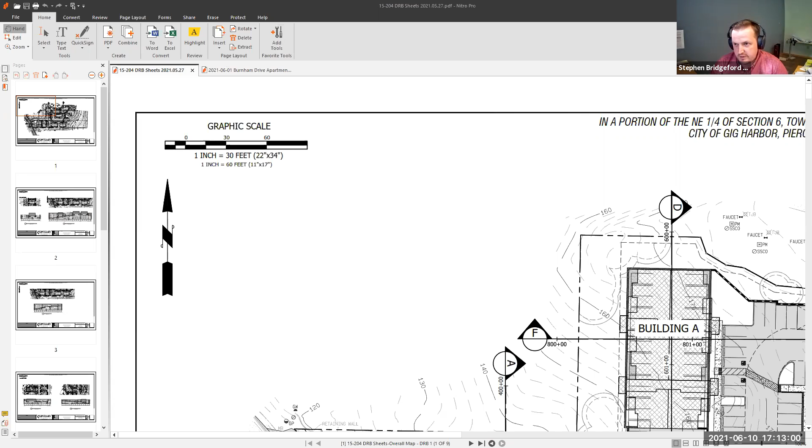So we've put together some more detailed exhibits for review tonight, giving a higher level of detail across the property with cross sections to take a look at the grading elements and talk about some of the options we investigated during preliminary review on that accessible path into the site, and things we considered to try and make that work and make it as accommodating as possible to access the middle of a site that's as sloped as it is, which is always going to be challenging to tick all the boxes to make it work right.

Be as accessible and accommodating as possible. So I guess we can just go through some of the cross sections here in detail, if there's some specific areas that the board wanted to see in relation to things. I don't know that there's a specific presentation more than just additional information to try to help answer some of the questions that came up in the previous meeting. If there's specific areas we wanted to look at on how things sat and how we balance showing some of the finished grades and existing grades on the site.

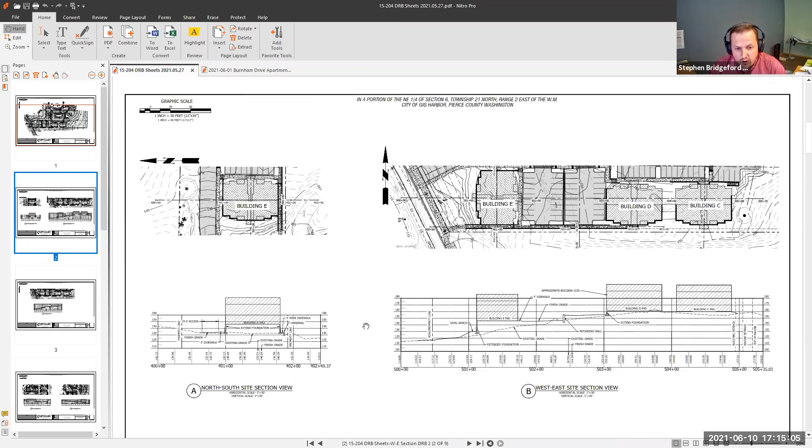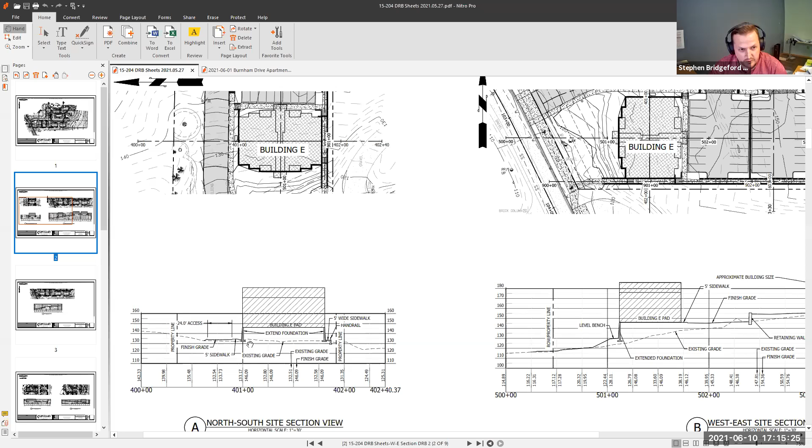This sheet is just the general overview of the property, showing the existing grades. But we'll go down and look more closely at this, this is building E, which is up front. You can see how it sits, and that walkway down here, where the accessible walkway comes up along the side of the building, and how the building is associated with the finished grade.

We tried to keep our scales here so that the horizontal and vertical scales were showing more of a realistic presentation, rather than oftentimes you'll see that horizontal scale and vertical scale are different, so you see some exaggeration. But with how the building here sits up front...

Moving over into a view that runs along that entire southern property line, showing how the site steps down here with the extended foundations. And I'm not seeing, I guess the walkway doesn't really come up on this, Jeremy, in this view, taking it through the building side there, so we can't really see how the walkway works along that side, but we can see the general grading with the existing grade here in the dashed line, and then our finished grades with the site stepping up the slope.

To prevent the mass grade. In this area here, as we mentioned before, this is where the storm facility, part of the storm facility, will go under this parking lot. So that's some of the fill and grade associated with how that underground storm system will work in there. And the buildings we're showing just as a general shape and height, just for reference. We're not showing the architect's exact building, just the general height of the buildings in this view.

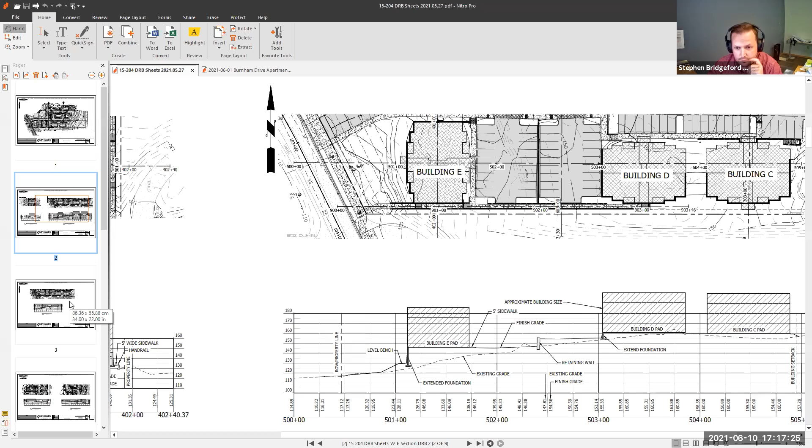This view shows the walkway. We've got a cross section coming right up the center of that walkway, showing how that interfaces with the existing grades and where those lifts will be.

One of the questions last time was what capacity will those lifts serve. They will serve multiple people, rated so that multiple people can go down the lift at the same time, I think up to 3, depending on weight capacities, but a minimum of 2, so there will be people when needed to provide assistance or just to accompany.

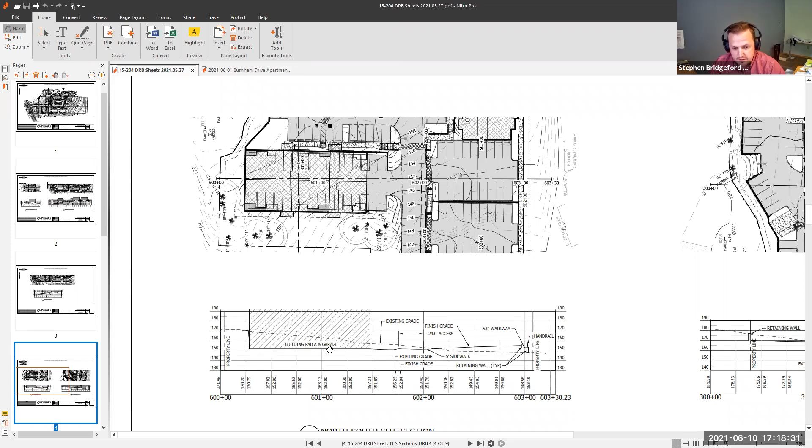This is the building with the garage. You can see how it's cutting into the slopes because of the garage, and with the walkway, that will be one of the bigger cuts on site, and what's increasing that volume above the 10% will be partly associated with this and with the storm features.

This area is getting much more into a space where we're closer to our existing grades. And again, all of our scales are equal, so there's no exaggeration.

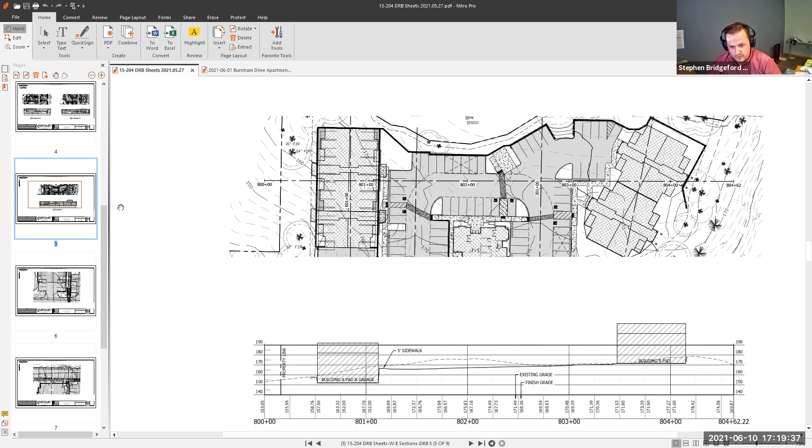That is along the northern property line. The RV park is up here, showing some of those grade changes.

Stephen, this is Darren, I have a question relative to all your cross sections in totality. Most of the sections appear, other than those two cuts on the latter sections, like mostly section F, where it seems a lot of the buildings are sitting and a lot of finished grade is sitting up above grade, with the exception of the northern portion of the site. When we're looking at a 20% variance between existing and proposed conditions, are you bringing material on or exporting material off?

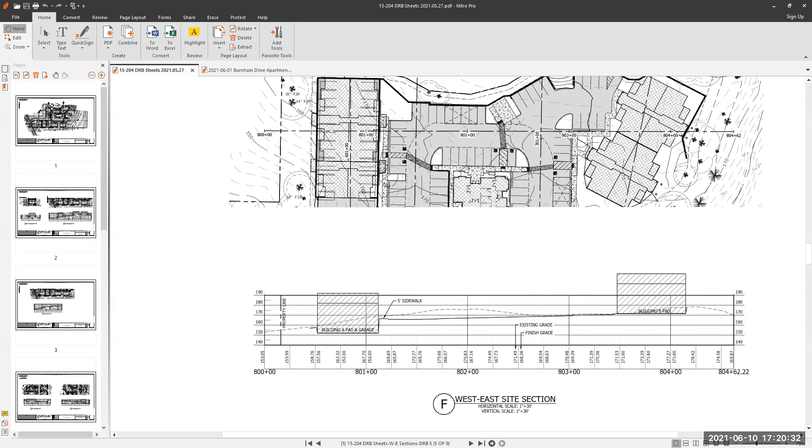I'll defer to Jeremy on that. Do we have a sheet that has those cuts on it, right, Jeremy? I'm going to interrupt really quick just to let you know that I do want to open it up for public comment before the DRB opens up to full discussion on it. But why don't you go ahead and answer this one?

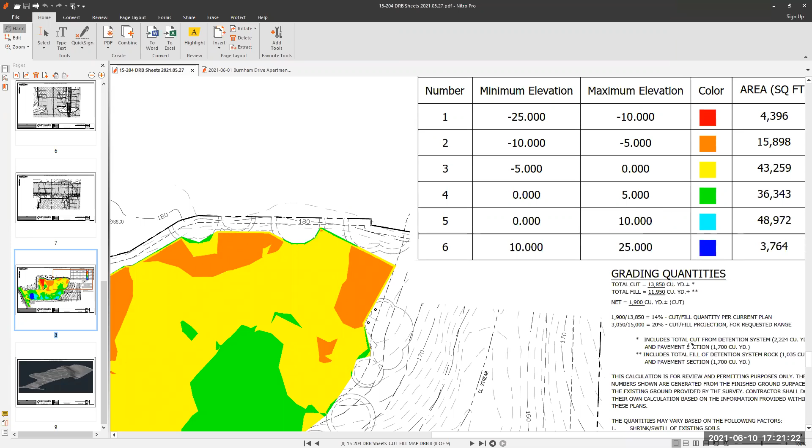So I guess where I'm going with this is maybe a general question, not only for staff but also for my colleagues on the DRB. The intent of balancing the site, as it relates to the design manual, is that we are looking at designs that work with the natural topography. But in this case, where you're actually cutting a lot of material out for subsurface storm drainage infrastructure, that's in one sense kind of below the line, so it's not anything that's ultimately seen, but it does have a factor in the cut and fill. I want to make sure my colleagues as well as staff understand this, and I think this starts to muddy the discussion a bit.

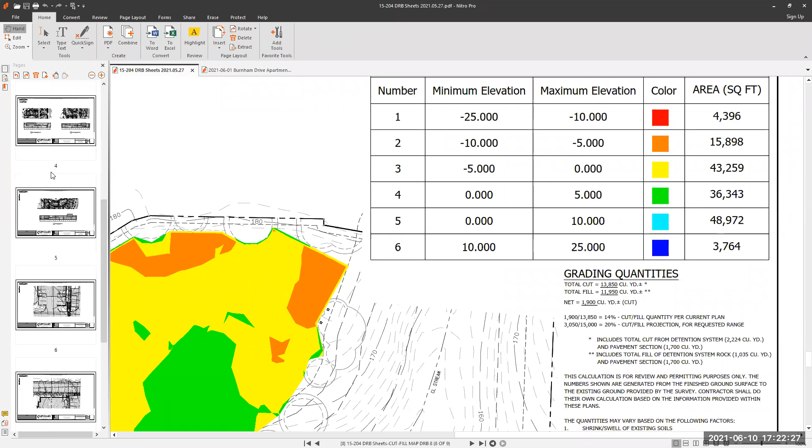I want to make sure that when we're looking at the buildings, when I look at the cross sections, it looks like some of the buildings and other things are sort of hovering above the finished grade to a degree. Specifically building E, when you're coming up the site, we're going to have a tremendous retaining wall there. I don't want to get confused with the actual quantities or numbers in cut and fill with the ultimate goal, which is that buildings and improvements are really trying to work with, in essence, what was the existing topography to a degree, keeping in that 6-foot retaining wall heights and such, as opposed to looking at the end number.

Because again, we're providing all this storm drainage infrastructure that's below grade, and there has to be exports in regards to making room for that, but it doesn't really factor into why we have this provision in the design manual. Did that make sense, Brett and Marlene?

Looking at these cross sections so far as they're presented, I don't really have too many issues with the exception of building E. I will look at the cross section the other way. If you look at the existing grade and see where the building's footprint is, it's hovering quite a bit above, but it's more apparent when looking at cross section B.

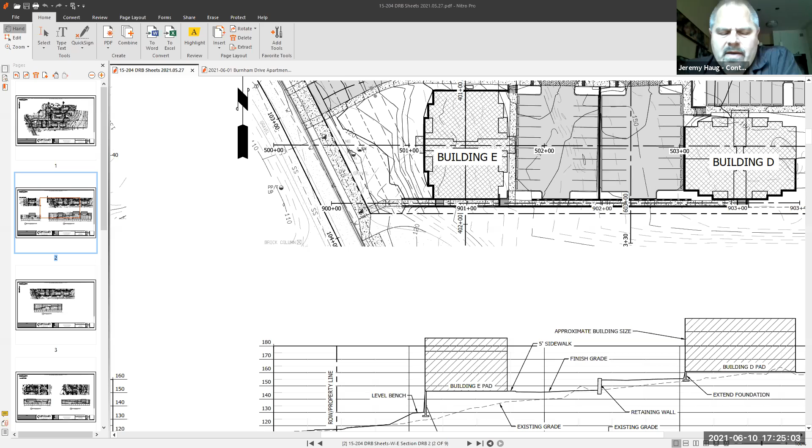And I presume you have some elevations of that face of building E that we can take a look at. There were some architectural elevations of that building that were in the initial package submittal. I'm not sure if they were in this revision or not - Stephen can bring those up.

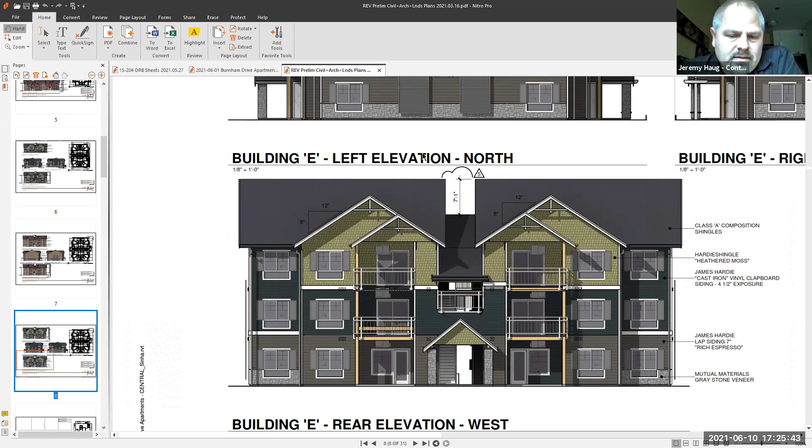Okay, so they weren't. Yeah, so this elevation didn't necessarily show that foundation dropping on that side. So that's, I'm just saying from a scale standpoint, is a problem for me because that building is massive on that face.

I'm more leaning towards this idea of the number balancing out. I'd almost say that the number that is needed - and my colleagues can check me on this - the number needed to excavate for the subsurface storm systems and infrastructure should be discounted, meaning that's not relevant when trying to fit the architecture and development within the existing grade. If you needed X amount of thousand cubic yards to deal with that system, that really should be set aside in reserve and not counted against us or the project when balancing the site.

That's the way I would look at it. Meaning if the buildings needed to sit lower in the site on this end - I don't know if that works or doesn't work, but it seems like it would be a better solution specifically for building E. With your accessibility trying to get down to Burnham, the building sitting lower would be helpful. But it seems like on the north side of the site, you're already cutting down into it substantially as it is.

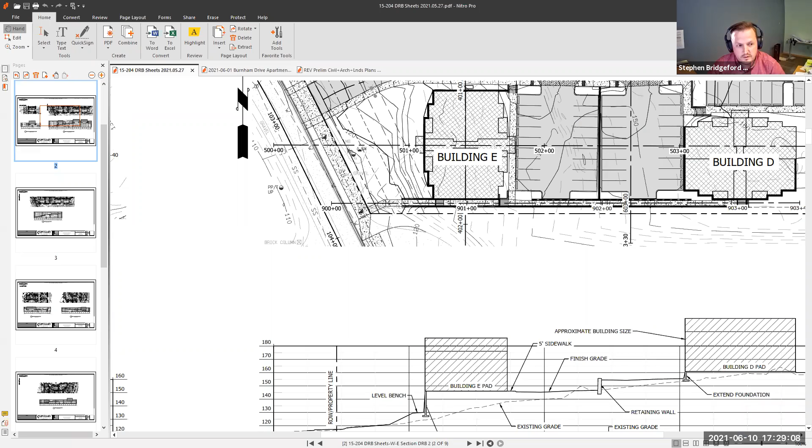So that is the building, this building right here. That view is probably from standing over here in the crosswalk parking lot, looking in towards the garage door. So we can see how that garage door opening is interfacing with this wall over here - that's about 12 feet tall.

And I can try and pull up - if you can pull up that last one that was sent in after the information was submitted, it shows a little bit better representation.

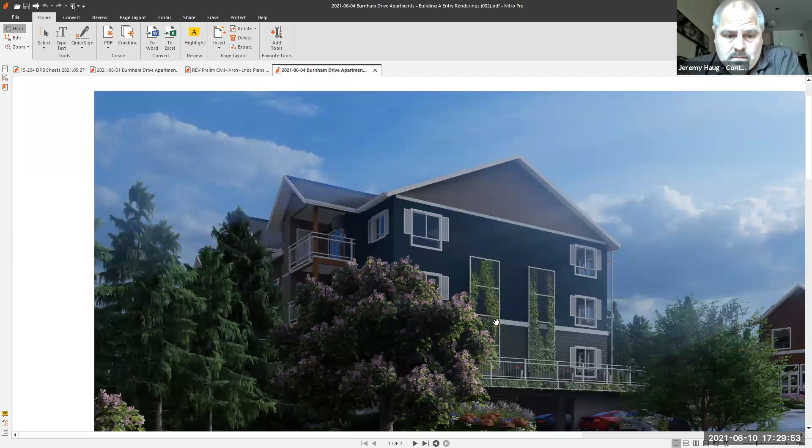We're trying to add in some more of the vegetation from the landscape plans to see how the view could look from entering into the site. They also have a second, more close-up shot here showing a possible alternative to screen that wall with some trellising that would match in style to the trellising on the side of several of the buildings, to screen that wall from view as you're coming in.

Thank you, Stephen. Appreciate that. I think now would be a good time to open up to public comment.

If you'd like to make public comment and you're on the phone, press star nine and it will raise your hand. I am not seeing any public comments. Okay, well then we're going to go ahead and close public comment and we'll move on to open up discussion to the board.

All right, just looking at this image, this is Darren. So looking at the image on the screen now, what is that guardrail assembly right there that's running across the top? Is that a pathway that's up there? And where, if it is, where does it lead to? Or is it individual balconies? What is that up there on that end of the building?

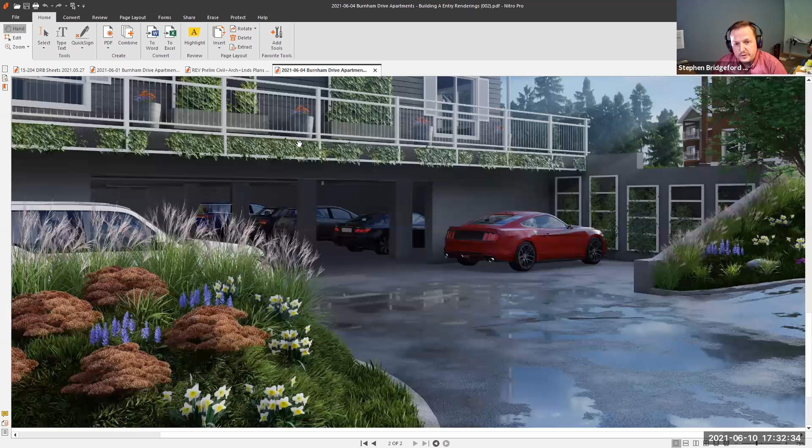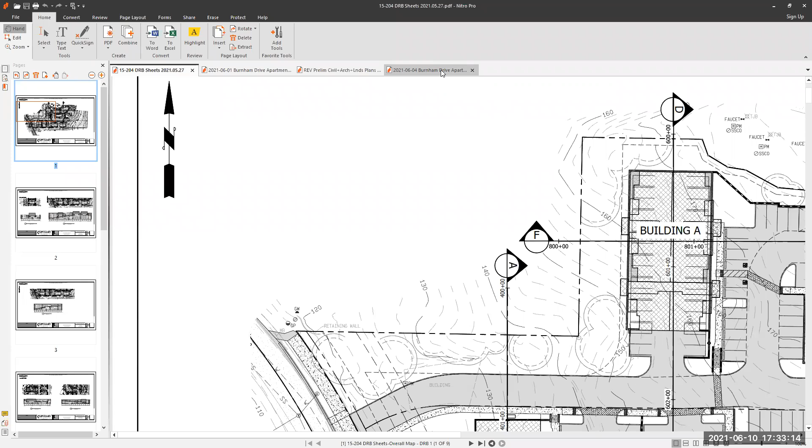Well, I think if you're going to do something like that, obviously be somewhat truthful and have some purpose to it. If the residents can use it, or they're walking around to what would be the west side, building A — I don't know if the topography lends itself to that — but I wouldn't look at it as sort of a gimmick piece. I would use it in some sense, either as two individual balconies that people can actually use and step out on, or it has some purpose to it. I see the intent, but just be genuine with what you're proposing.

Is there any other discussion, or do we want to organize the talk based on the two site design items and the architectural item?

I've got topo, primary walkways, and parking garage. Do you want to start with topo? We already kind of started with it. Do you want to finish it?

Yeah, I think so. Just to reiterate on my comments relative to the numbers, I'm not really concerned about this percentage, 20%, 14%, give leeway. I think ultimately it's about the buildings and the access nestling down closer to the existing grade. And I'd be really curious to see how much displacement the storm systems underneath these parking areas are causing as an export factor, because it really seems like the buildings, specifically this building, are artificially up out of the grade unnecessarily. It just appears to be that way. I wouldn't necessarily say that's true with buildings A and B — maybe a little more so with buildings D and C — but again, that's just my initial take on what's being presented.

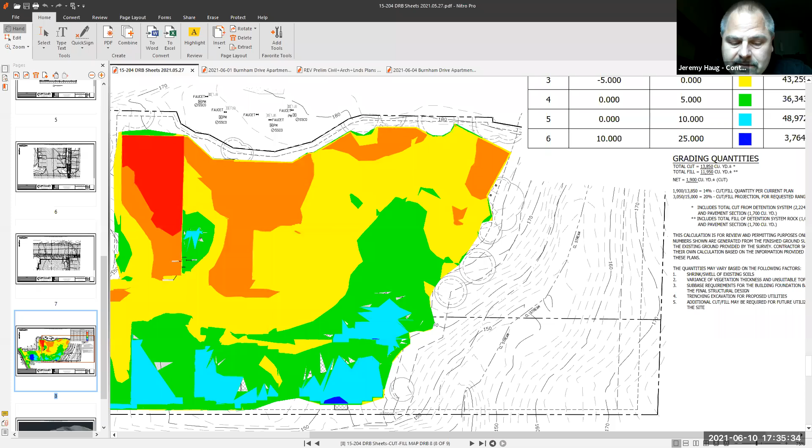Well, so just to add on to that, Darren — the reason this building is set where it is is because, as the drive from Burnham comes up at the maximum slope to the parking area, that kind of set that grade. So we could lower that building a few feet and have a step down, a split-level sort of thing, but that doesn't necessarily help with the accessibility either. So I understand what you're saying — give me a general overview of it. Obviously you guys are trying to find your numbers that are closer to balancing this thing out, and I get that.

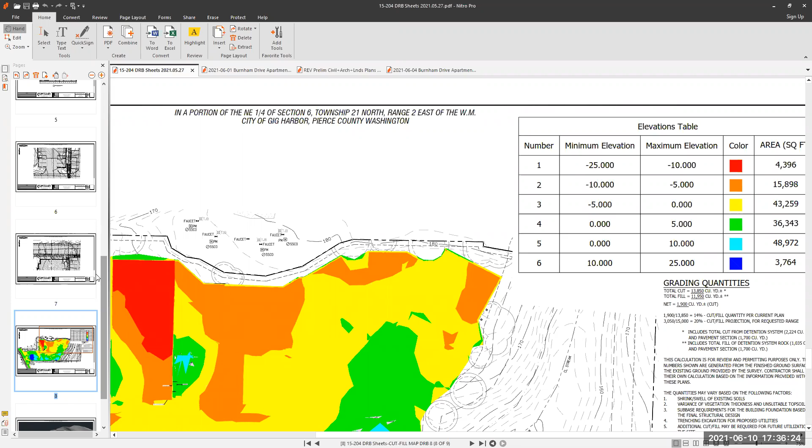Are you feeling comfortable on the north end of the site that you push this thing down into the grade? I don't think there's a problem with the north end development. It seems like you guys are cutting this thing down into the grade fairly well. I think what's happening is on the southern end of the site, specifically moving west, that it looks like it's hovering out of the grade. So I don't know if there's kind of a happy medium to still revisit. But I'm not overly concerned about the percentage at this point. I am concerned about building E looking crazy in height right now.

If we lowered building E 2 feet and lowered the drive coming in on Burnham accordingly, and transferred that grading to the east, it would end up cutting more as you go through the east side of the site. So it generates quite a bit more cut because you have to catch that grade. It is a balancing act, and we've gone through many iterations of grading the site to try to get it all to balance with all the other constraints, wall heights, trees, everything else. I do see that building E is sitting up on the west end, and we can lower it a little bit and split that, but it doesn't really help the accessibility element either.

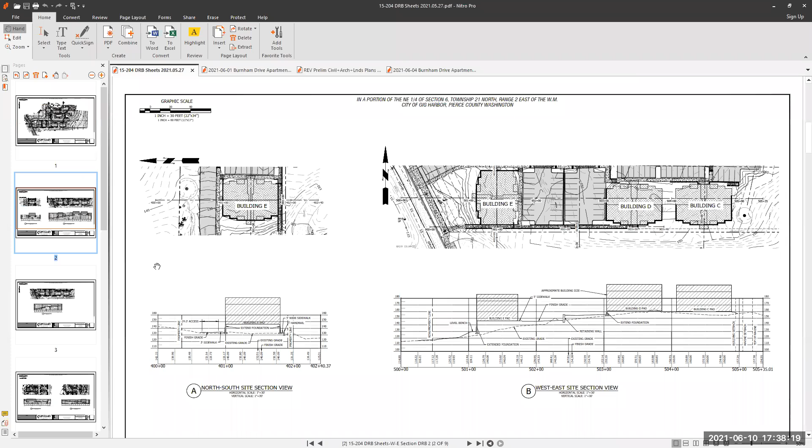So it is a rough balancing. You're splitting, with building D and building E, those parking and access are split already, but it's the cross moving north on the site across the entry drive, right? And going towards building A? I guess, can you repeat that again? I'm looking at, as you ascend up through the site, would you grab your full site plan? So building E and the associated parking east of the building, all of that sits at one grade. And building D and its associated parking west of that is separate, so those can move at different positions vertically.

But within reason, right? Your entry drive as it comes up, talk to me about how that's working with building A. It seems like you've got your entry drive, and then access to building E's parking, building D's parking, and building A's subterranean parking. If we start adjusting those, do they all need to adjust collectively? Or can we vary them a little bit and then look at them in total by bringing them all down a bit? E is the problem child in my mind. Everything else is probably working fairly well, but E is just really awkward. And it's the building you see, the one that's going to represent this development coming from Burnham. It's really the only architectural piece you're going to see.

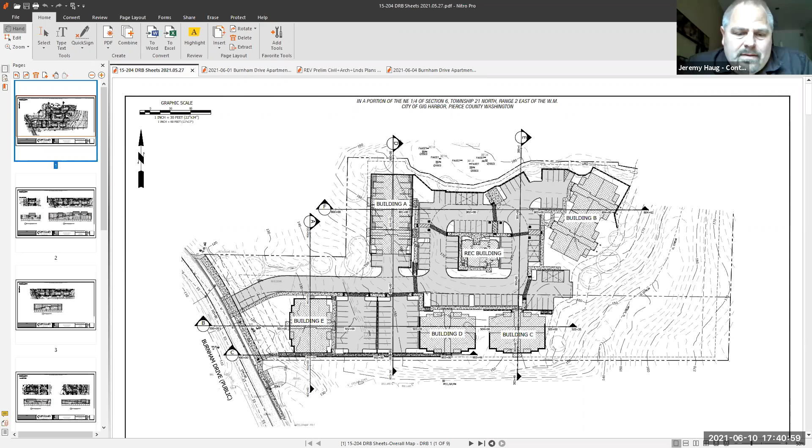I'm not for just arbitrarily taking everything and pushing buildings A through E down 5, 10 feet, when we've got massive retainage that would happen on the north end of the site in order to do it, just for the sake of building E. But I would say that building E may need some more mitigation. It's just got an elevation that's got another story and a half that's not being represented right now. And personally, I'm not going to speak for my colleagues, but I'd say we really need to see how that building is going to present.

Is there landscaping? I mean, that's where that buffer is off the main drag, right? So there should be a lot of foliage in front of it, is there not?

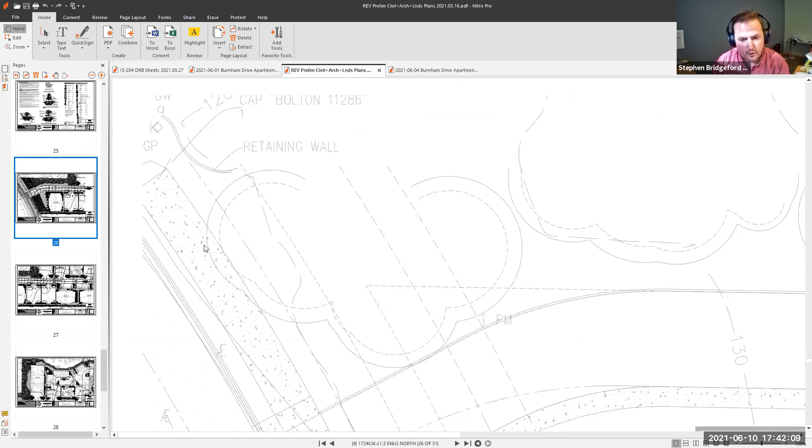Yeah, it all meets the standards for the corridor buffering. So it'll be heavily screened, the building itself sits outside of that corridor. So what's the general height of those trees in front of it? Do you know?

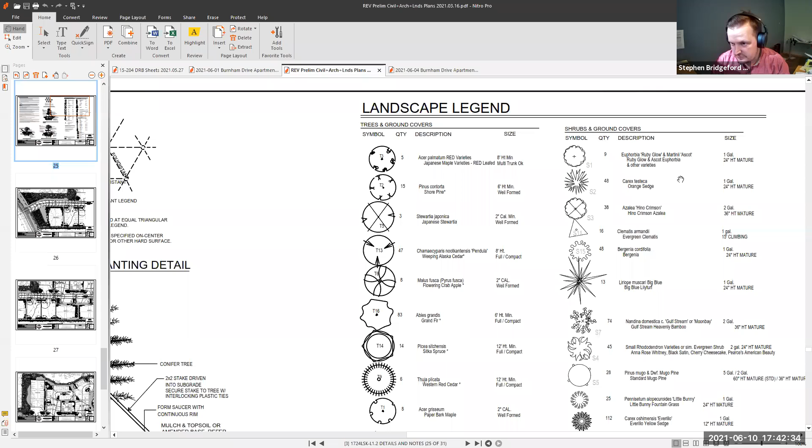I don't think Kathy's on. No, so I think the fir trees, I'd have to compare. It looks like... Do you want me to step in a little bit here, Stephen? Yes, please. Sure, yeah, Chair, to answer your question.

In as general terms as possible, the planting required in that area is a zone transition buffer, and it's required to meet very strict planting requirements of a dense vegetative buffer. The dense vegetative buffer requires shrubs to be a minimum of a 5-gallon size at planting. It also requires in excess of our normal requirements for evergreen trees of 40%. The dense vegetative buffer requires even more than that and planted in kind of an offset fashion.

And so the trees that you'd expect to see there would be typical Pacific Northwest evergreen trees reaching a few hundred feet, grand firs, Sitka spruce, western red cedar. So those will grow up in front of that—like what Darren's getting at is that's kind of the prominent facade of this project, right? So those will grow up in front of it.

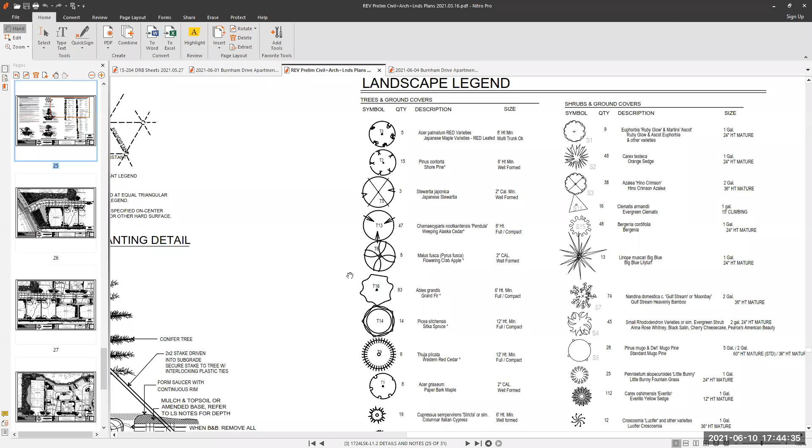Correct, yes, but it's newly graded. So when it says, on the landscape plans—I was looking at L1.1—it talks about an enhanced 40-foot landscape buffer. So I can't recall, is that area being graded enough that there's no existing landscaping being retained and it's all newly planted? No, we have some significant trees, I think, but maybe not in front of that building.

Correct, I don't think there's anything significant in front of that building. Yeah, I think there's no significant vegetation down there, but there would be some enhancements in the area for existing vegetation for some sight lines if you're coming down from the north on Burnham, but traveling north there wouldn't be much on-site significant vegetation in there. I think that's where the clearing kind of is for that existing structure.

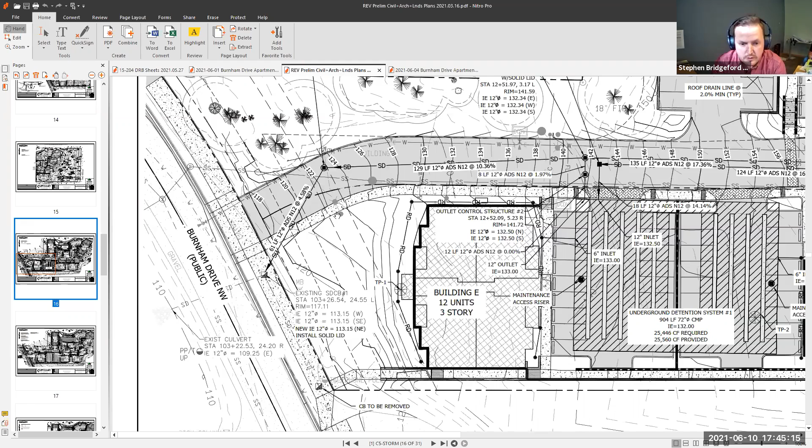Well, again, as it's being presented so far, I don't have any issue with what we're saying in regards to percentages. I think most of the site is doing a good job of keeping the new development close to the existing grade, with the exception of building E.

So for me to feel comfortable moving forward with approving from a site standpoint relative to how the grading is, I'd need to see more about how building E is being rendered, because it is sticking up out of the ground a full, almost like a story and a half.

And Chair, we haven't really seen it yet. In time, yeah, it'll be buffered, but initially I think we need to look at that. It's gonna look like a pretty tall building.

Thanks, Chair. Yeah, Stephen, can you navigate to the last page here in this plan set? I just want for Darren's earlier question to be answered. You guys have computed—oh sorry, it's not this one, it's your DRB sheets. In the DRB sheets, yeah. Go to your grading quantities.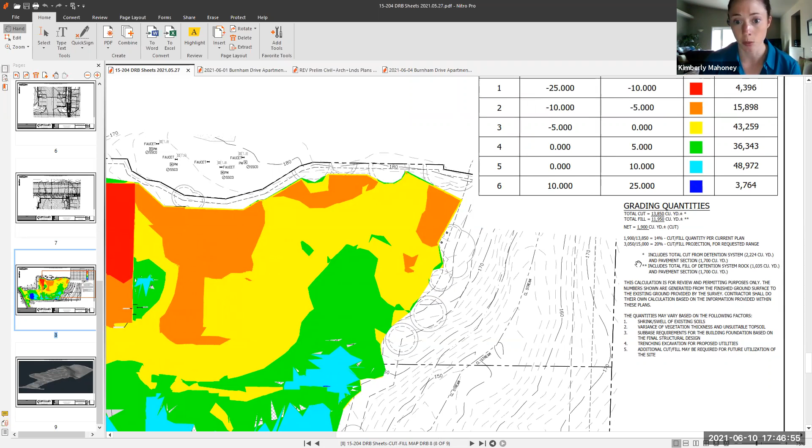The information that Darren's asking for, an understanding of the storm and the amount of grading necessary for that, is included—you guys have run those calcs. So I just wanted you to zoom in on that to address his question and also better inform the other DRB members for their consideration of the grading that's going to take place on the site.

Again, I'm not tracking exactly right now, and if I misspeak please correct me, but the cut that would be necessary for the storm infrastructure, your storm retention, is underneath the two parking areas, right? If I remember seeing that right.

I think there's 3 total systems, Jeremy. There's one up top and the 2 down in between building E and D. Correct, yeah, correct. And I assume those have a significant cut to make room for those systems, right?

Right, I mean, we have to cut down and excavate down to the bottom of that facility and then backfill it with the appropriate material and install it. And are those systems showing in your cross sections right now? No, okay. Do they, Jeremy, off the top of your head—are they actually below the existing grade line or not? And where I'm going with that is, are we talking about numbers that are actual cut from the existing grade?

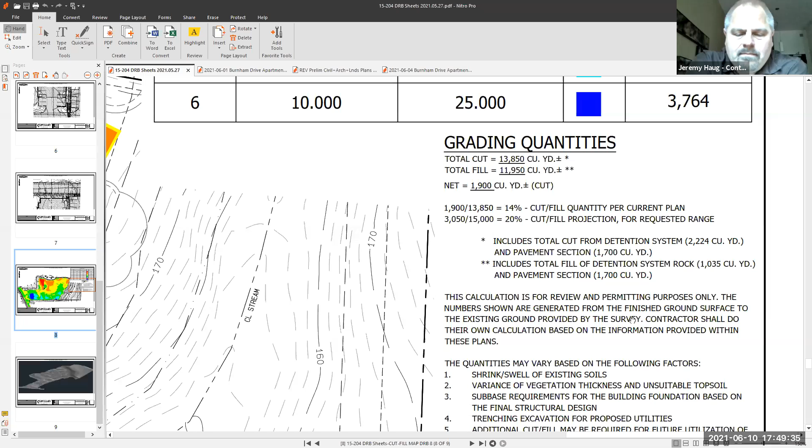And I know that on that storm system, I don't have the design plan in front of me, but I'm pretty sure that the bottom of that system would be cut into the native, but not necessarily the entire depth of the storm system. Okay, Marlene, can I get a pulse on where you are with the topo?

I'm going to agree that there's nothing magical about the numbers, the balance numbers. And yeah, I would also agree that the cut that's required for the storm retention, we can exclude that, I guess, as it contributes to the out of balance of the cut to the fill, because you're not perceiving that, right? What you perceive is all the finish grades. And I do want to ask you something.

Between the parking pads of E and D, there's a retaining wall that shows up on section B. How tall is that retaining wall? I believe it's only 5 or 6 feet, I believe, something like that. Okay.

Yeah, I mean, so we talk a lot about intention, and the intention is not to just take the buildings you want and plop them on the site, and cut and fill the site to make it fit the buildings. There's definitely some moves that are sort of good site sensitivity, and again, trying to balance it. And I suppose part of that is reducing the width of the building slightly and breaking them up into different buildings that have different finish heights.

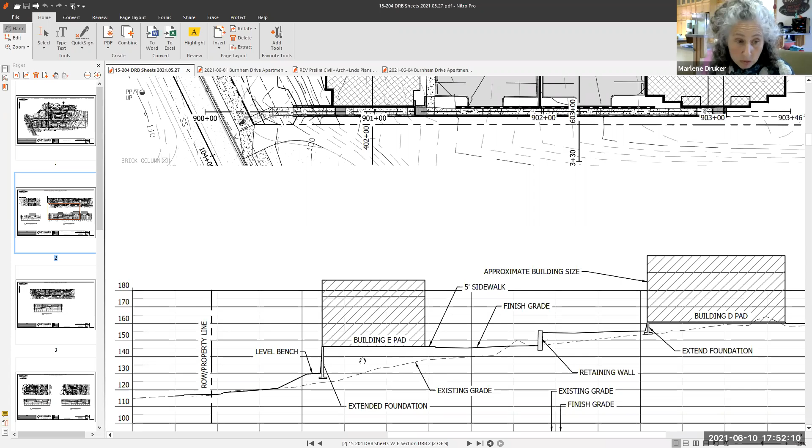Thank you, Marlene. I say for now, let's move forward if everyone's okay, to the next subject of the primary walkway design. Are we okay with that? I'm good with that. Okay, so do we have any questions of the applicant?

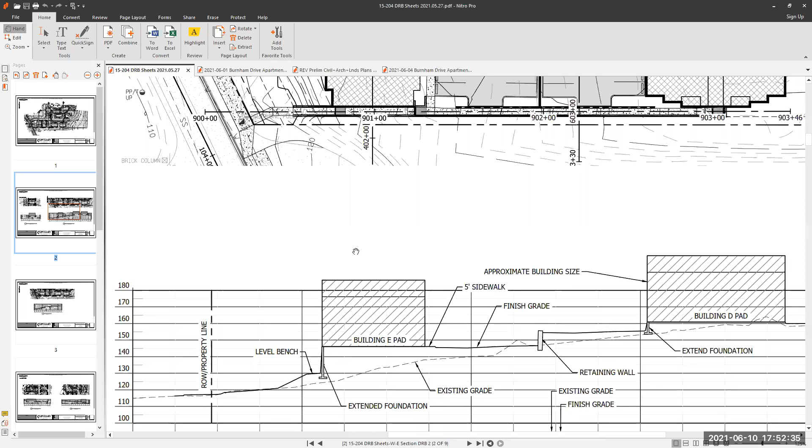Well, it seemed like, from what I could see too, there was an attempt to kind of demonstrate an accessible ramp configuration, which is somewhat laughable. I feel bad that they even went through that exercise. I don't know if you have that drawing, but it just looks like, if I were in need of using that, I feel like I had spent a trip climbing Everest to get up to the site. I'd rather use the lift, to be honest with you.

Again, even in the past, I didn't have a problem with the lifts. I know that Linda, although she's not here, voiced some concern about how that felt from an accessibility standpoint. And I think I amended my comment to say that if the lifts were large enough to accommodate multiple people so that people could ascend or descend collectively as a smaller group, I think that would be more sensitive.

So take us through this thing. I just want to, someone spent the time putting this together, so we should give you your day to at least. Looks like a placemat at a restaurant, the ones the kids draw through.

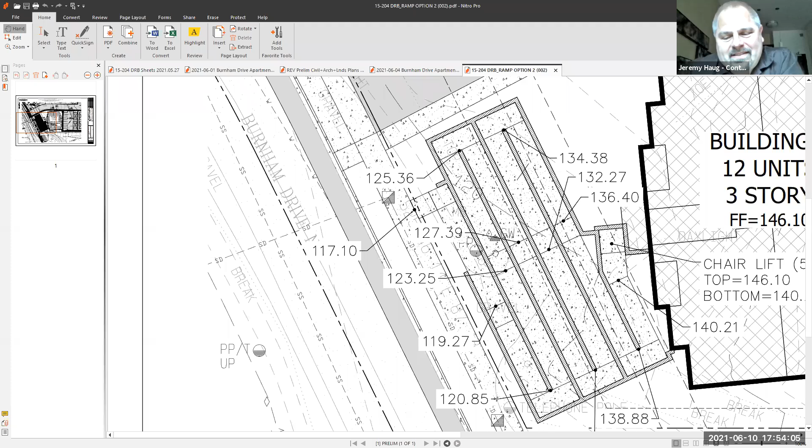So yeah, it's not very practical. And even at the end of it, you still needed a lift, didn't you? Correct, it's like two. So, all right. Well, I don't know, I would buy someone a dinner for their efforts on that, at least in kind. But that is just not practical, by any stretch.

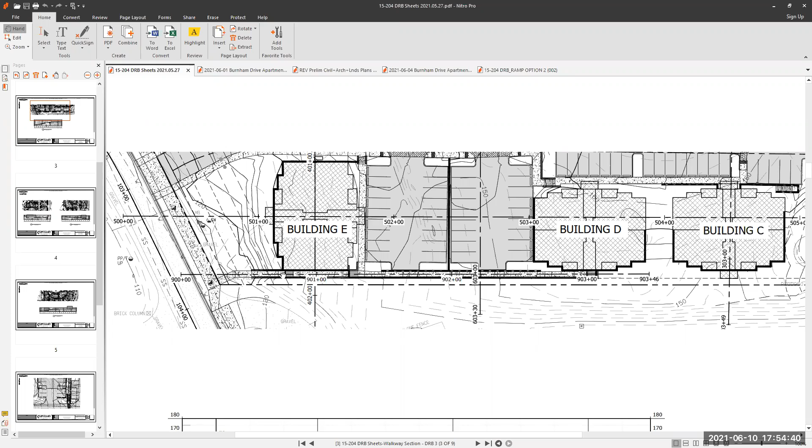So I think what you're doing is definitely considerate. Again, if you can get the width and make sure that the lifts can accommodate multiple people, I don't have any concern with it. Some of these terrains we're talking about are pretty much not accessible at all, so you are giving people an ability to navigate them, which is commendable. I guess that's just short of it.

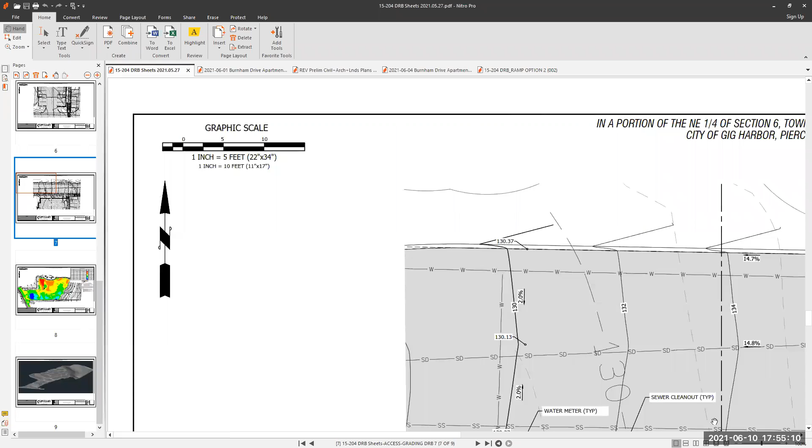And last in this is you guys were just talking about the pathways, maybe adding some benches, other things. I think it was along building A that we were looking at, right? That was the pathway we were talking about mostly. So does it have some landscaping by it? Is it wide enough? How is that all connected? Maybe you guys could show us how that looks now.

Yeah, there wasn't a lot of detail, I feel like any detail kind of got tabled as we talked about the potential accessible path and any changes that may happen there. So I think a lot of what we did was just look at what the actual dimensions are, what we're talking about, how short we are. So we wanted to provide some more close-up details of that. I think I can also go back to that architect's rendering.

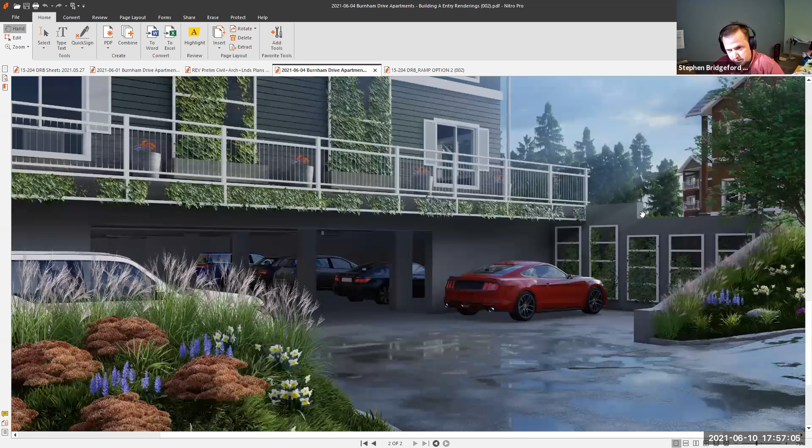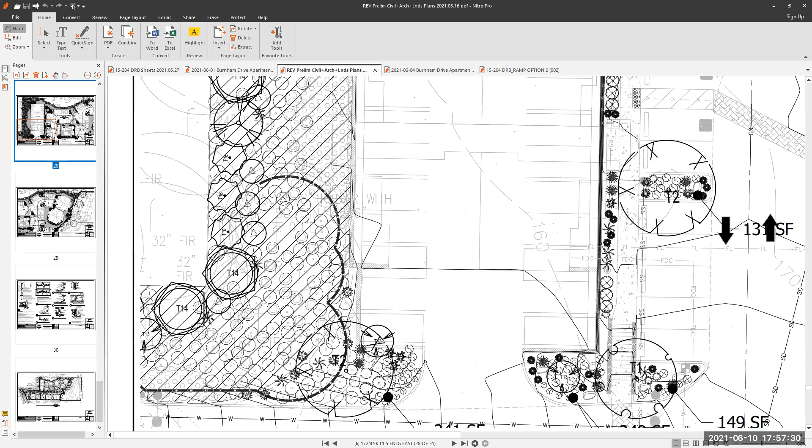Well, I think my comment is the general pathway is fine. Some of the detailing, obviously with the balcony breaking up the building on that end, is more specific to not wanting it to look like this parking structure we were looking at. So some of the elements you're starting to use to break that down, I think are working. And here, I think our concern was whether that pathway has some space wide enough for some landscaping along building A.

It seems like that can work fairly well. I don't remember what some of the other comments were from the other board members on that, whether we were looking at planters or elements on the building, I just can't recall, but it seems like the general location of the path is working. And if you're getting enough space to create a legitimate landscape area in there, I think that pathway is nicely enhanced. And I think on the face of this building, Darren, building E, there's trellising there too, so you're kind of softening the face of the building.

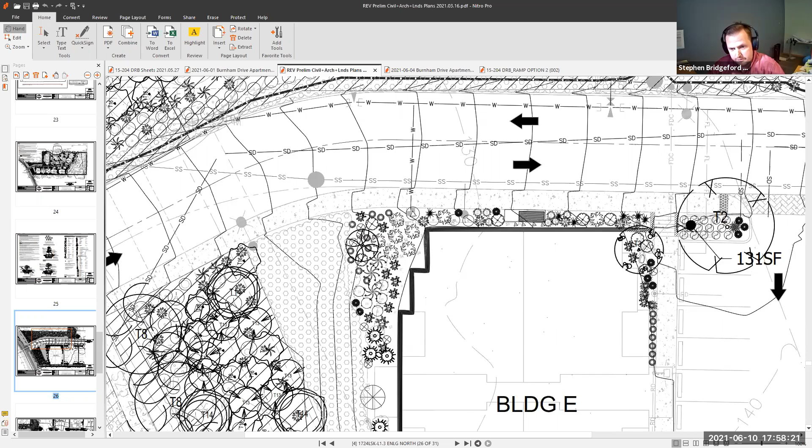I think what Kim's looking for is the city wants some guidance on whether the compromise of the parking, benches areas, is a superior design element to the lack of depth of that border, right Kim? Is that what you're looking for? So that's really what we're addressing here.

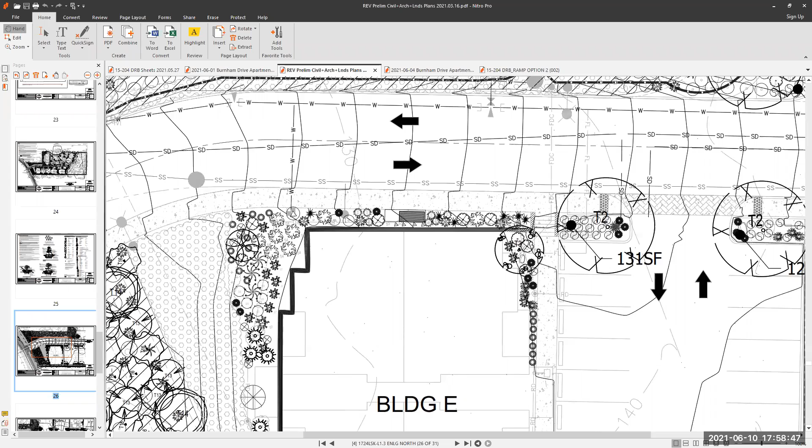Yeah, the applicant's proposal for how they're achieving an equivalent or superior design solution to a full five feet of landscaping adjacent to the primary walkway in all areas is by providing a couple of additional benches. My hope is that the conversation will lend itself to whether the DRB agrees that the incorporation of additional benches is also found to be equivalent or superior, considering that the landscaping areas that are shy of five feet truly aren't shy by much, but whether the benches can be seen as an equivalent or superior alternative to those infrequent instances of a slightly narrower landscaping area is hopefully an understanding that I'll take away from this meeting.

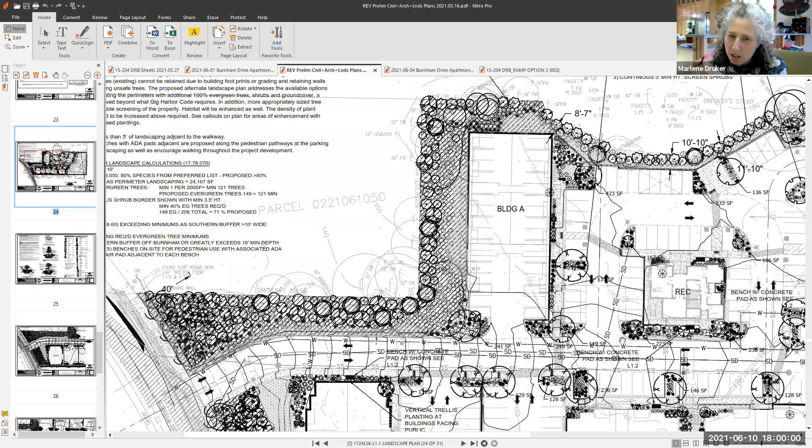Thank you, Kim, that's really helpful. Marlene, I know you had questions about it last time, what are your thoughts today? I don't think anyone goes to a building and says, oh, if there were just 10 more inches of landscaping, everything would be fabulous. I realize the code says 5 feet because it has to say something that can be measured and quantified.

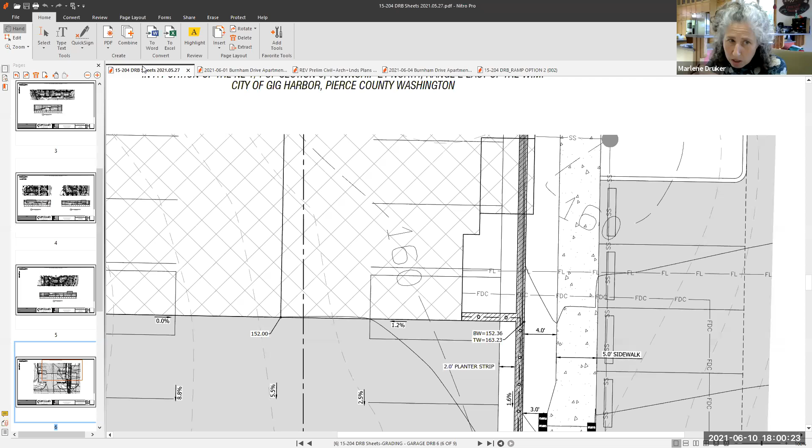I think last time we determined that instead of 5 feet in certain places, there was 4'2". Is that right? Was that the minimum we had? I think when we came through and measured it here, the minimum from here to the face of the wall is 4 foot, and then as the stair structure comes up through here, it's as narrow as 3 feet through this area, and then in front of building A, and down in front of building E, it's 4'2".

Yeah, 4 foot right in amongst this wall area.

Yeah, it's just... you've made this so tight. It's not, I don't think anyone's going to miss that 1 foot that much, but it is sort of a reflection on how tight you've designed this site, that there's nowhere to find 1 extra foot of buffer. I guess we could look at all these places where it's narrowed in those ways.

And just look at whether that's really... what's the 5 feet? I guess the question is, what's the 5 feet intended to achieve? Is it supposed to just give some space between a walkway and a building face? What are we planning to do with it? And in that way, does it matter? Have you provided enough of a buffer between walkway and building that being 1 foot short is going to matter that much?

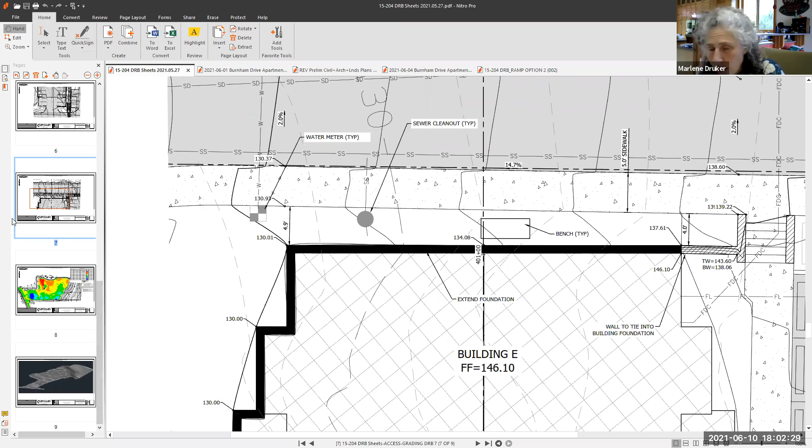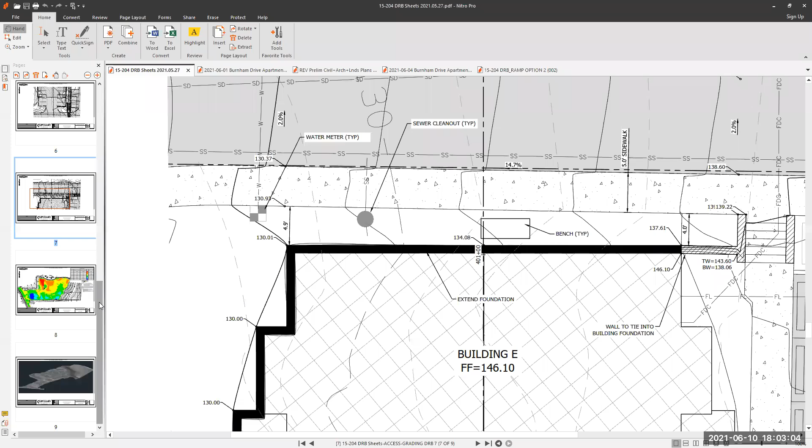Yeah, I might chime in to Marlene that, to some degree, you could say, well, if we had 5 feet as a prescriptive width and it was just a linear buffer, a primary walkway and that's all we had, that would be the baseline minimum. But I'd argue maybe in this case, if it is shorter than 5 feet, the benefit is that we have larger areas far greater than 5 feet that aren't too infrequent that you pass by, right?

You have areas that might have 15, 20, or 30 feet, right? Like on the west side of building E, right? You have a substantial amount of buffer and landscaping. And then, yeah, it gets a little tight, but then it opens back up and you get more. That to me seems more why we would say this is an equivalent solution, because where it does get tight, we make it really wide in certain areas, and it's not too far in between.

Okay. I don't like reiterating what other people say. I'll just say that I think the lift accommodating multiple people was a smart move. There's not many places you can put the ADA walkway on this area, so I don't really see it getting much better than what you did with the ADA.

I am in agreement with Marlene that I would be hesitant to say the benches are a superior design. I think we probably need to decide just if we're okay with the landscaping as it is. I don't think we have to add that the benches make it better, but you can tell me, Kim, if that works for you.

Yeah, Chair, perhaps the motion could even address with specificity the point Darren was just making, about there being other areas on the site where landscaping isn't required but is provided, and that in that manner it's equivalent, achieves some sort of equivalent solution. Yeah, I think that'd be great.

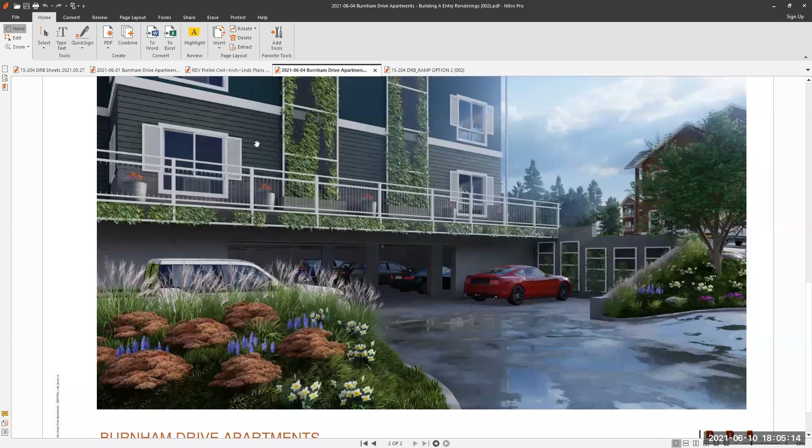Again, my comments are, I think we're flanking the entrance with landscaping, which is fine. I don't know, as sincere as the renderings attempt is, I don't know how necessarily it represents what's really going to be there. But I get the sense that the designers are trying to do things to help soften it, and I think that ultimately the intent can be met.

I just like to make sure we're still being genuine with that experience there, that as you come up through that first thing, just like on building A, we're going to be staring at a massive amount of foundation, so it has a soft sort of landscape to it. And it looks like it's modulated well. That balcony piece on the end of the building, the horizontal walkway that appears there, if that goes to nowhere, I'd say that's not really doing a good job.

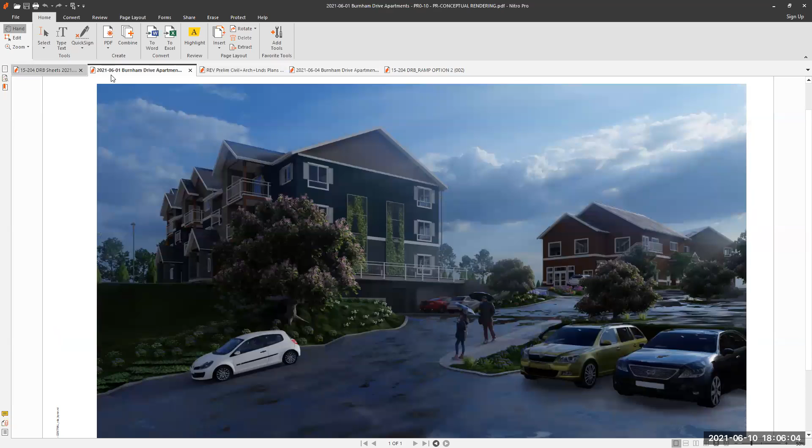Gimmicks or tricks, I don't think are really what we're intending to do here. But I would be genuine with it if you're going to do it. And I think it does modulate the building pretty well. It gives it a nice little soft base and tucks that garage underneath of it a bit more, making it a little more obscure.

I think the fact you're flanking the entrance, the driveway entrance to that subgrade parking, with two substantial landscape areas, both east and west of the driveway, is nice. I think the elements are there. I don't know if I'm really convinced the final rendition is there, looking at it, but I think you have the strategies in place to get it done.

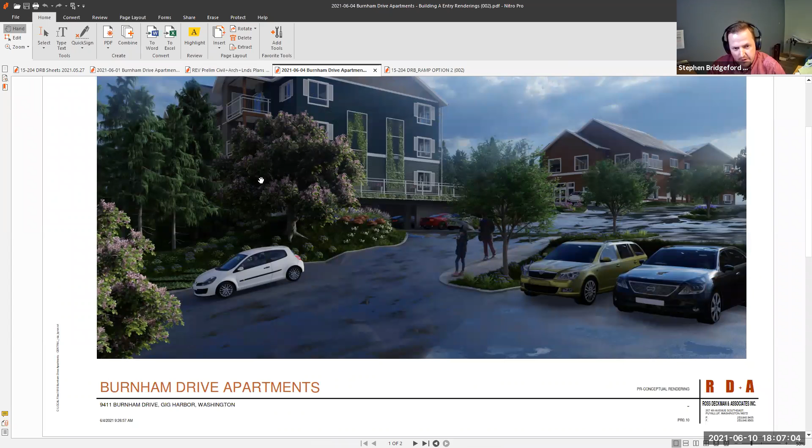And Darren, I think we could connect it. There's not a lot of connectivity with the way the slope is back there, but the unit in the rear on the corner could be connected to that walkway, and we can look at the width of it, see if we can provide enough width where some seating, like little patio tables, can be provided. Probably with the way those windows are, you'd want to look at positioning them more center, or putting them in an area where you're not sitting right in front of somebody's unit window.

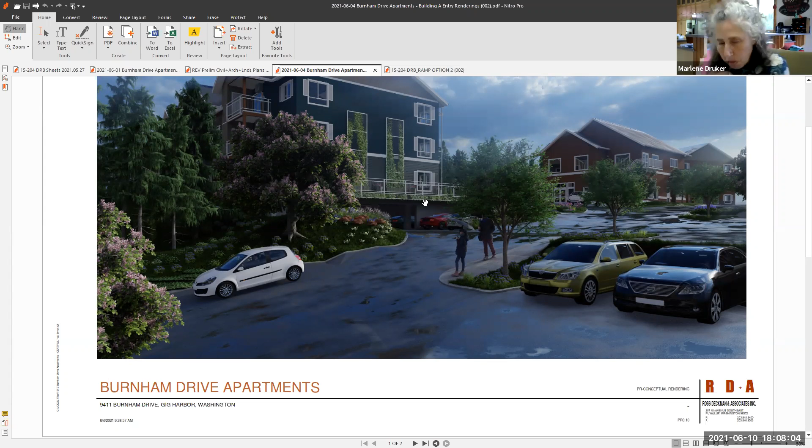But I think there could be some way to encourage some use of it from tenants. Yeah, you actually have an opportunity to do something nice there and usable, that is more than just... I think having the overhang there kind of detracts from the meanness of going into a concrete bunker. But yeah, it would be nice if it had a purpose, if it was used in some way and activated, that would be better than just having a railing that doesn't do anything, or that just holds geraniums.

And yeah, I think the landscaping on the outside is helpful, and I think that was the intent of what they were looking for. I do think the overhang there is actually a good idea, because it'll put all that into shadow and de-emphasize it. So it's a good idea. It just would be nice if it was seen as an opportunity to be an exterior place rather than just an add-on thing.

Am I looking at the one that's above the red vehicle there? We're looking at two specific units on the ground level of building A, right?

So with that, it almost seems like maybe it's not a contiguous pathway that connects from the walk, but maybe they are more balcony elements that you can come out from each of those units at the lower level of A, and sit outside, but they still have privacy, so it's not just a general thoroughfare for anyone to walk by. I think they could still serve the purpose of breaking up the building on the backside, but they could be more personal to those units.

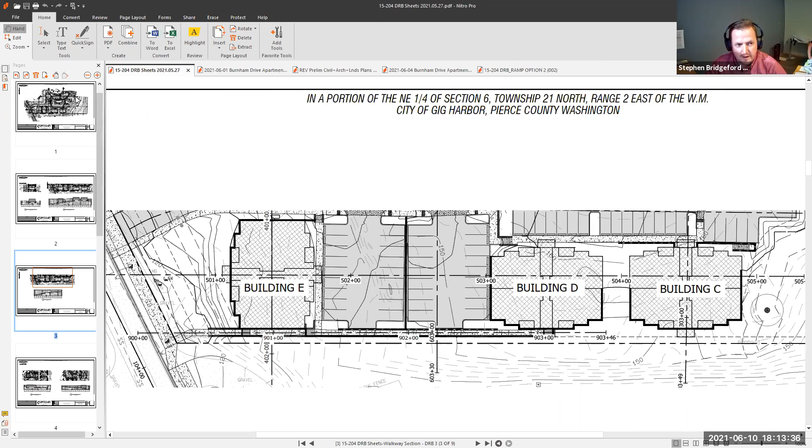Yeah, because the amenities of the site are all located up in this relatively flat area. This whole route through here is accessible. So the challenge was to get all the units into the rec building, get all the units to the garbage facilities, and then once you're there, how do you get them down to Burnham? How do you make an accessible path down to the road when you're sitting up at this elevation?

So what I hear you saying, Stephen, is that all the other buildings are pretty much accessible once they're in them to those rec areas and common spaces, with the exception of building E. All the accessible units within the facility are up here at top, and then the accessibility throughout the site is up here at the top.

The issue we had was how do you get people from up here to Burnham? Not necessarily building E - it's the units and everything from the top down to accessibility for people that are using Burnham, maybe using the trolley, or Burnham is improving the road. There's city projects, I think, to make improvements.

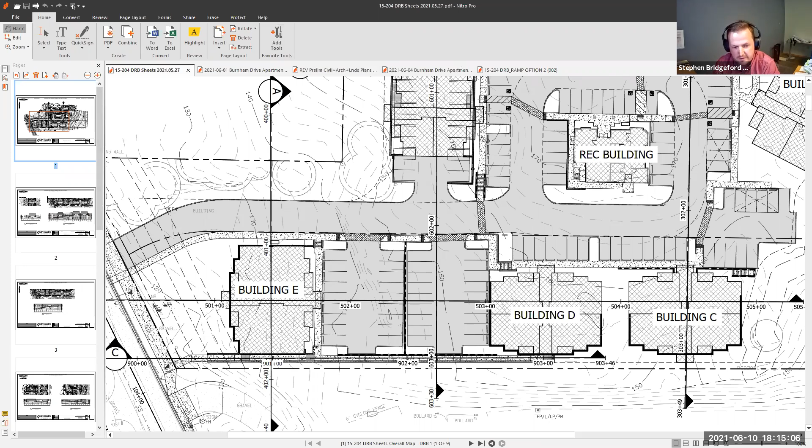I don't know if it includes sidewalks. That's really helpful. But is there even a sidewalk out there right now on Burnham? Will there be a path on Burnham? That's in the works. Once they get the accessibility down to Burnham, they're going to be able to make it to that trolley.

I don't think there's a trolley stop. I don't know where the closest trolley stop is. We're closing the gap in front of the Eagles. There's a little gap right here that we'll be closing to make that connection.

I can't remember - I think the closest trolley stop is either down in front of the Hy-Iu-Hee-Hee or up in front of the RV park, where there isn't a sidewalk. There is a plan in the works to get sidewalks, a side path all the way down Burnham, so maybe in my lifetime people won't be walking in the ditch there.

So let me just ask you something. When people do that final lift to building D, then they go through building D to get to the pad that's in the middle - is that how you have that sequenced? Correct.

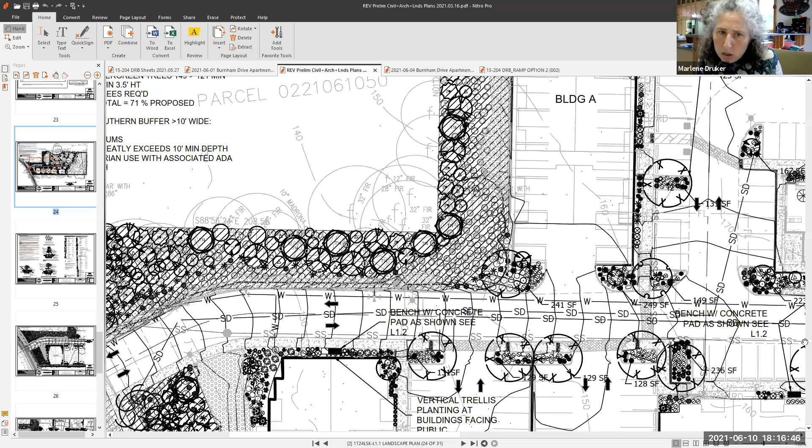And just for your residential buildings, what's your total number of units? What is it - 78? And how many were required to be accessible for people in wheelchairs? I will have to get into the landscape plans, unless you remember, Jeremy.

I don't recall. Yeah, there's a ratio. I don't remember what it is. Yeah, and then the different.

Are those accessible units scattered amongst all the different buildings? So I think we can see it here in this plan. We have this in building B, and then the different types of units as well. We have to have a ratio. So building B, and then I guess they're here, and I thought there was some in C and D, and then the rest of them are in A. I thought they were dispersed.

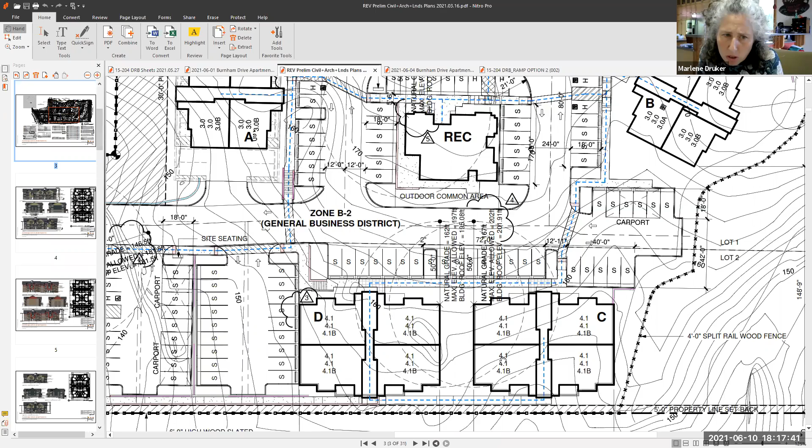Oh, I see. So these blue lines are actually your accessible path. Is that what I'm looking at? Okay, or that's no, because this isn't accessible. Okay, no, that's just your walkway path. Yeah, sorry, it goes over there. That's not your accessible route.

Yeah, let's see if I can. I don't know what that layer is. This is the architect's plans.

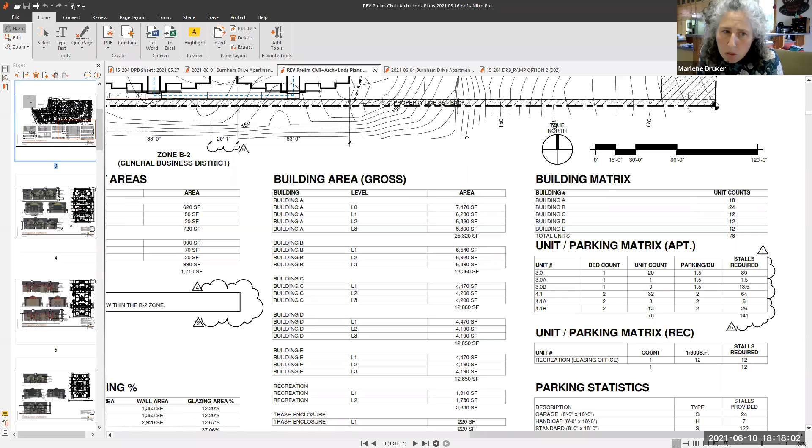You know, I'd say those chair lifts don't have a great track record. I think for personal residential units they work really well. In public applications, we've seen that they have a lot of maintenance issues. The two that the city owns, I've never seen them functioning.

I'm trying not to laugh at that. Well, I mean, it's a shame, and the Americans with Disabilities Act is not my favorite piece of legislation, but there's an intention to it, which I don't think doing this really meets. I mean, I think it'll meet the letter, but...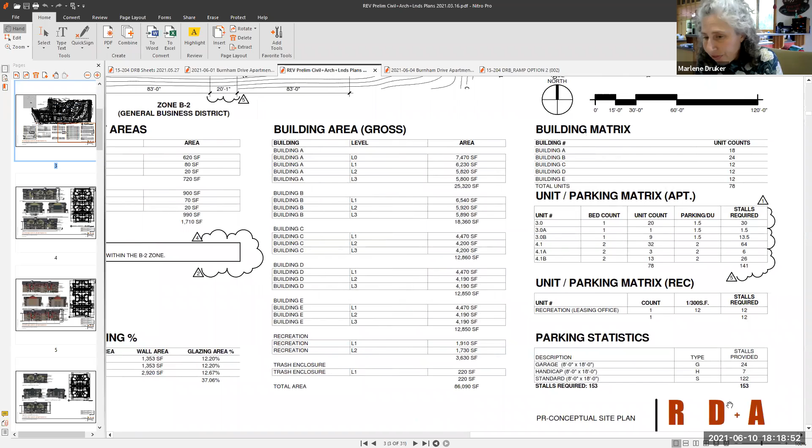Oh, there you go. Unit, okay, parking matrix, parking. I'm not seeing their unit count.

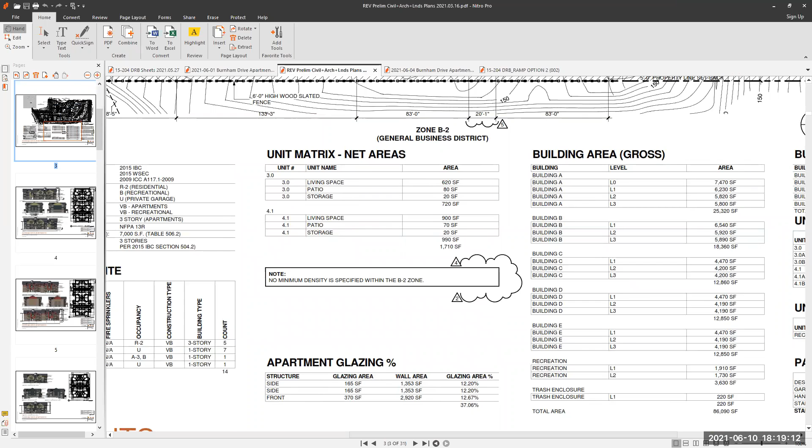Well, I think the information so far has been really helpful in illuminating that most of the activity that will be accessible is on the same level, with the exception of getting down to Burnham, which eventually will have a sidewalk.

I would like to see that path done better. And if you're saying that you need to have higher retaining walls to make that path work, I'm going to say make that path work better.

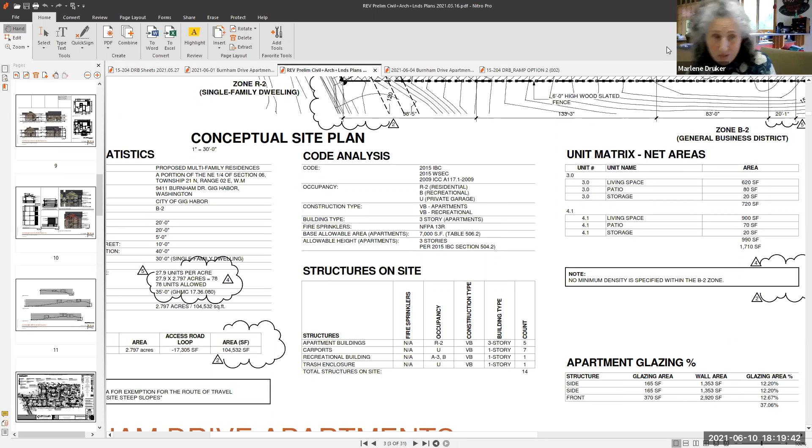Just me, okay. So far, and this is just me kind of feeling out what was said, correct me if I'm wrong, it sounds like you guys are not ready to make a motion on the first item of natural topography or the item that involves the ADA.

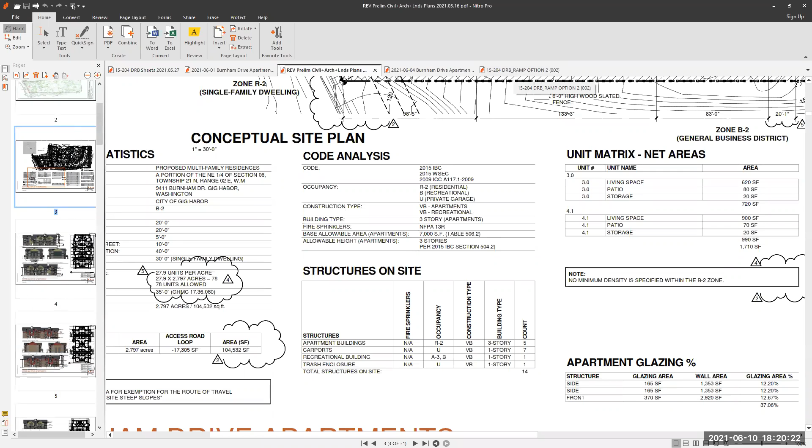I'm not sure if you can make a partial motion based on the landscape portion. Kim, you might be able to speak to that. And then do you want to see the parking garage again? I guess, how much are we asking them to come back with, and are we making a motion on anything tonight?

Okay, well, I guess for the parking garage, since we're looking at it, we'd like to see that developed, maybe see it in the plan and in the elevation of what that thing that you've added is actually going to be. And we've kind of been in consensus that we want to see it be not just decorative, but useful in some way that makes sense for the rest of the project. And we'll leave that up to the applicant to figure out exactly what that is.

I think we all agreed that we like the gesture of it, but that we want to see it developed into a real thing. So I don't know if we're ready to sign off on it and just trust that it's going to be right when it's done, or make a recommendation that we want to see it again.

Well, chiming in on it, Marlene, I think that we would need to see some elements associated maybe with building E, because we haven't really seen the true elevations for that. And since we would be doing that, I don't see any reason why we couldn't just ask to see this again in the development. That way we don't have to put the onus on staff to try to interpret what we're thinking.

So again, I'm not being hypercritical of the design team here. I think they have elements in place, and it's starting to look fine. It just needs to be truthful in what they're doing. And then I think they'll have a solution.

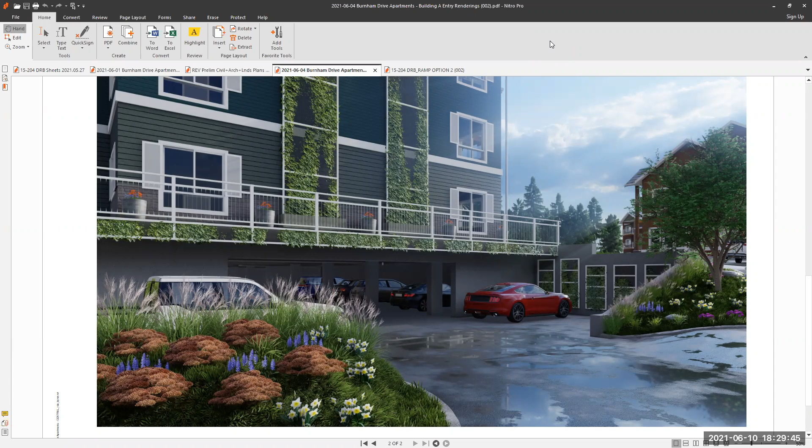And I think that relates to the natural site conditions - it looks a little awkward, and we should push it down closer to the existing site grade. I don't know what that means or the ramifications for that moving forward, but that's my last comment relative to site design.

Can I just say about Building E - maybe when you look at that closer, at what it's doing in the landscape, it actually makes sense to do something below where you're building. Maybe there's an opportunity for a movie theater or a storage building. And if that's another concrete bunker type thing, maybe look at what's above it and ways to soften it. If you have a wall that far out of the ground, maybe another level belongs in at least part of it. So when you develop that further, you might see opportunities to make the building take advantage of what that landscaping is, rather than just saying the landscaping doesn't work with what you want to do.

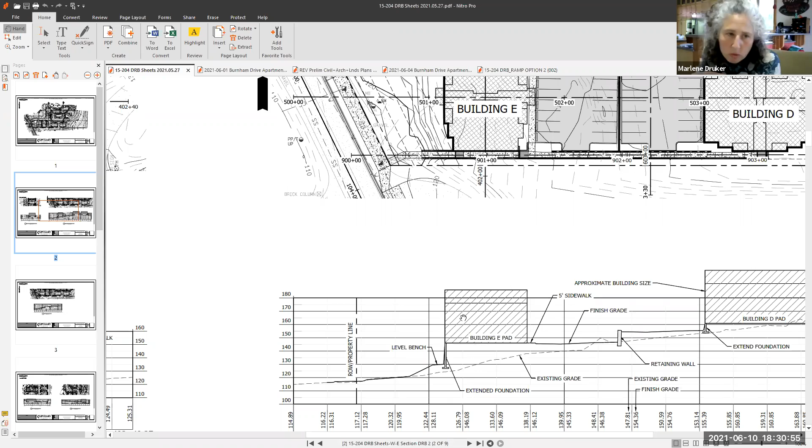Okay, I think I'd open it up to the applicant to see if you have any questions for the DRB, since we're asking you to come back again. Jeremy, do you have anything?

Well, I hear what you're saying, Darren, about Building E. We can look at that and provide some additional elevation from the architect showing what that would look like, and go back through to see what we can do differently there. It is challenging given the other constraints of trying to get the site to grade out and meet all the other requirements.

Well again, I think looking at that, from an architectural standpoint I'm empathetic to the civil engineering constraints. But when the architecture is forced into those proportions, it really needs to champion that - it's got to own it. If it's going to be this tall, the design has to make sure the ratios, the proportions, and the materiality are beautiful.

And maybe for the site, going back to those percentages, if you did some stepping with walls - I think that's where Marlene was going with some of her comments - I wouldn't be concerned if you added more material to the site and stepped it down a bit to help reduce the elevation of Building E. It'll ultimately be landscaped, maybe a combination of the buffer plus landscape terracing heading up there. But right now it sits significantly above the existing grade, and it's got to really own that in a beautiful way. If it's all architecture, then it's all architecture - we'd need to see the proportion, the scale, and the materials, and how that's going to work.

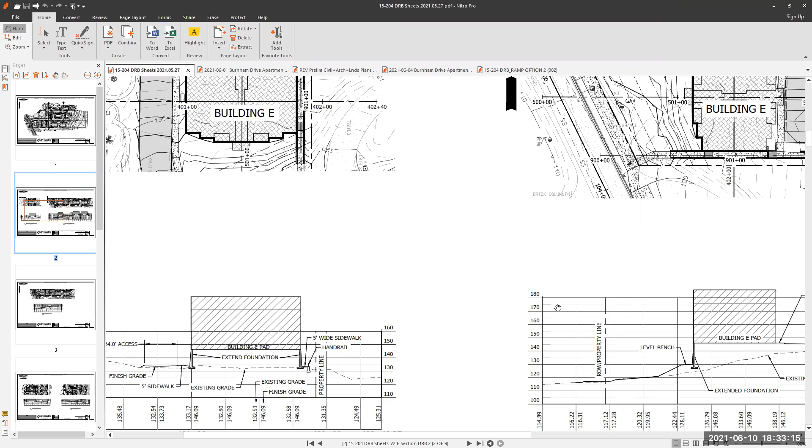Okay, as just another comment, let's imagine if you slide over on your section there, where your mouse is. Let's look at that section, that building E pad there. Let's imagine, if you will, that the lower floor of that building were a story and a half below where it is, right? And the building was like, I guess, a 1, 2, 3, 4, 5, 6-story building.

Well, we could argue that yes, the building is at grade, its lower level is sitting down at grade, and hence it'd be a moot point. So if that isn't the case and the main elevation is another story and a half up, well then the architecture's got to really save the day, so to speak. The building isn't really changing per se, but it would mean that we'd be looking at windows or doors on that lower level. The architecture would have some interest, and it would look like it's nestled at the grade as opposed to being a solid mass wall.

So hopefully that gives you some sense of where we're at. Again, the rest of the site, I think you guys have done a great job. It's challenging, and I'm empathetic, but this is kind of your front door piece right here. It's got to be the best.

Thank you, Darren. Okay, Kim, is there anything else you'd like us to go over before? Just a couple of things, yes, Chair.

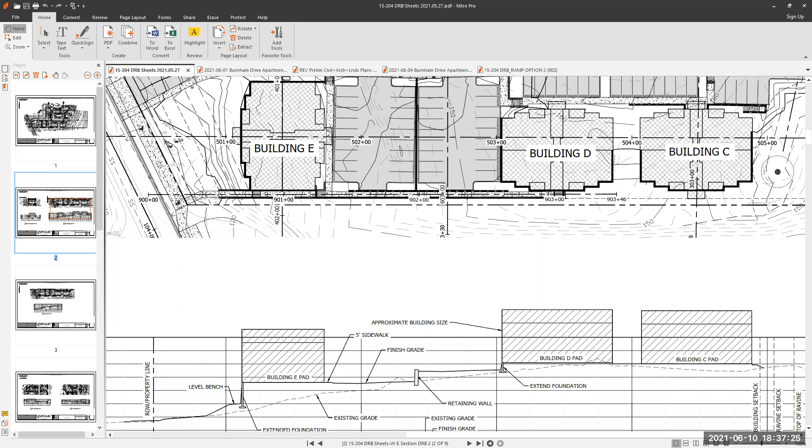Okay, Kim, so what I heard was two things. You want Marlene to address what her meaning was with better for ADA, and then you want a date for continuance that both the DRB and the applicant are okay with, having enough time to pull it together. Is that what I heard? Yes, those are the two long-winded things. Okay, I'm paying attention here, I'm working it. Okay, Marlene, you're up.

I can't compel you not to use a chair lift. They're legal things, you can use them. But I'm countering your argument that says I must have a high retaining wall because this is the only way that I can have an accessible path into these buildings, because I don't believe that. And again, you haven't explored the possibility of using an elevator, which elevators are common things for people who have disabilities.

Yeah, I'm not buying that the retaining wall is necessary, because this is the only way to do it. So, because there are lots of ways to do it, and I realize that they might be more expensive and they might require more thought, but I guess I want to see that.

I appreciate the ridiculousness of showing a switchback ramp, so we understand that a switchback ramp doesn't work on this site. But there's something better than what you have here, which is just putting your accessible way of travel at the back side of the site and having people run through buildings. It's just not a convenient way to do it. And I guess if you didn't need those retaining walls, I would have nothing to say about it. But since you do, this is what I'm saying about it.

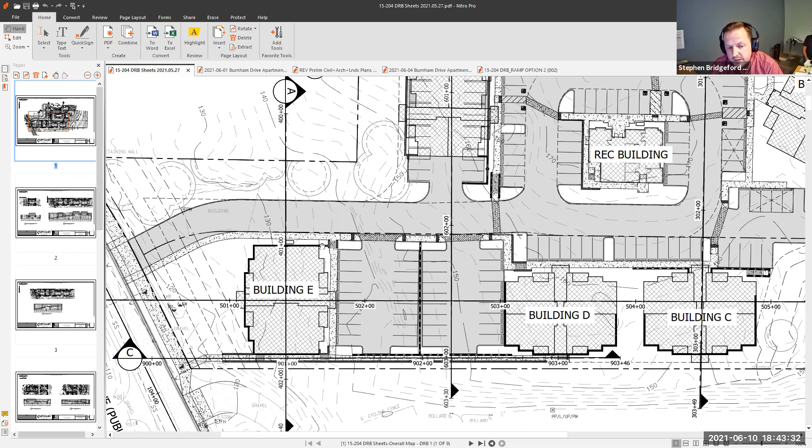I feel like some of your comments were a little off mark for our level of professionalism here, and seemed a little not constructive.

I'll apologize for that, but the lifts in the city of Gig Harbor, our group all says this is important to us. No one's come to fix them. When these break, are you planning to come and fix them? Okay, I'll apologize for the insensitivity there.

Marlene, correct me if I'm wrong, I think what you're looking for is the rest of the exploration. We saw that crazy pathway, which obviously isn't going to work, and you're asking us to just look at the elevator and see if that works. If it doesn't, then we're in this conversation again. Is that what you're asking?

Yeah, let's try that. You said your lift limits are 14 feet. In a way, I'd rather see you have fewer lifts. Think about the sequence of getting somebody into the lift and pushing the button and it goes up. I'd rather see you do more disturbance to the grade and have fewer lifts than more of them, so we could see what that looks like.

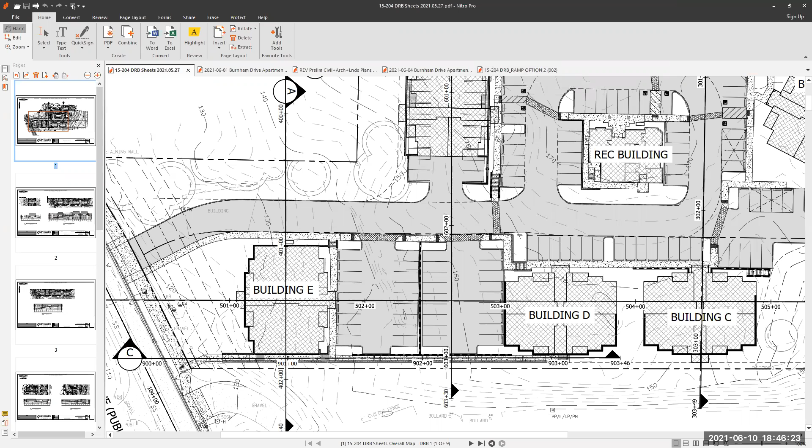Okay, perhaps we could look at an appropriate date for continuation. That sounds great. Let's start with Michelle, what's available, and then run it by Jeremy and Stephen to see what they think. I'm thinking late June or July. We have July 8th and 22nd.

This is kind of like an auction, guys. You're gonna have to bid on one of them. This is so they don't have to re-announce your application. The continuation makes it easier for everyone. It allows us to circumvent the noticing. Yeah.

So, talking with one of the owners here, we'll do the 22nd. Thank you, Stephen, I appreciate that. Michelle, you have that down? I do, I'll put that on the board. Okay, thanks, Michelle. Well, I think that ends the business of this project for today.

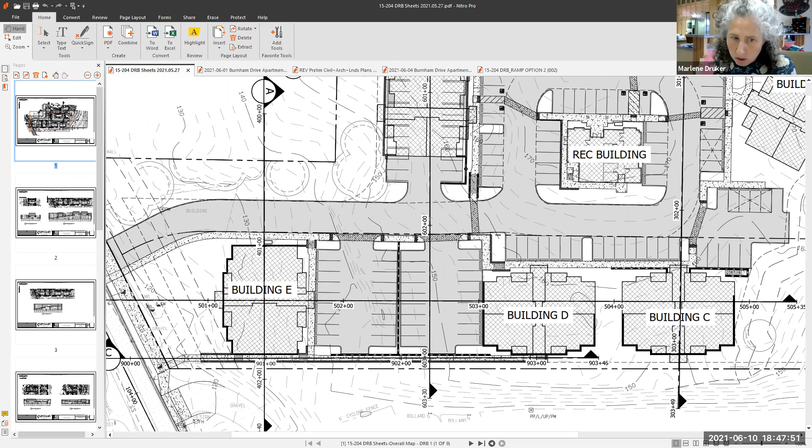I guess we'll see you guys on, you said July 22nd? Yes, Chair, can I ask the applicants one more question? The last time we saw, the landscape architect was part of your team, and I think that was helpful. I don't think we've had anybody from the architecture group attend this meeting, and it seems like a lot of our questions are about architecture. So I was wondering if for the next date we could have somebody from that team come to represent. Yes, okay. Thank you, Marlene.